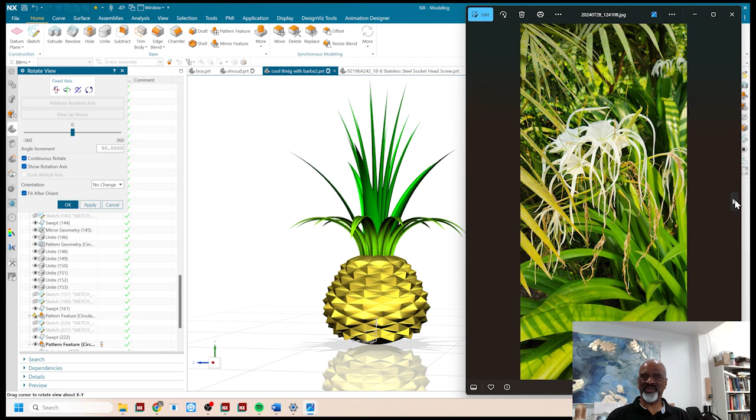And so I have some pictures, and the geometry was so inspiring that I decided to do a number of videos on how to create the geometry and how to borrow some of the shapes for my industrial design. As you know, I've been doing industrial design for many years, and I believe that a lot of really great industrial design comes from borrowing visual cues from nature, natural shapes.

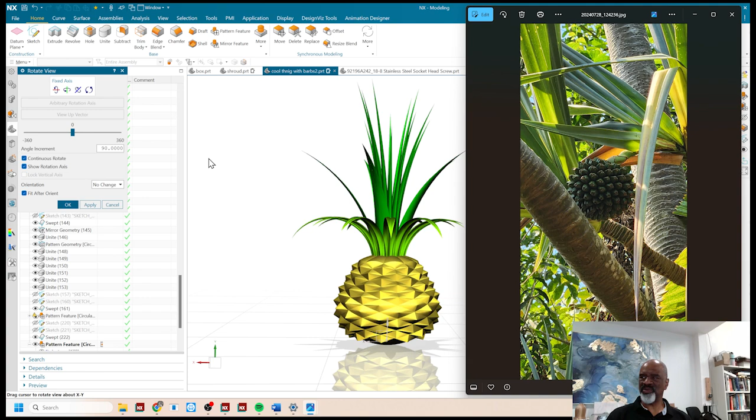And the one that most intrigued me for this particular video was this one here. It's increasingly exciting to me how these fruits and nuts grow with this kind of almost hexagonal pattern, and it looks so mathematical. Also, I went to Scotland, where I saw a lot of beautiful, beautiful design, these buildings.

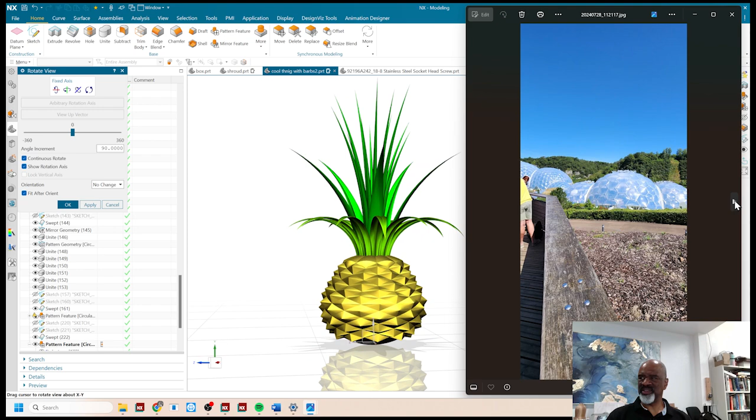I've always been intrigued by domes, but these buildings have stood there for 500 years, 600 years, and so I'm going to be doing a number of videos on some of those shapes as well. So with that said, we have this little piece of geometry that I've done, and I'd like to share with you some of the fine points of how I created it, because it was challenging.

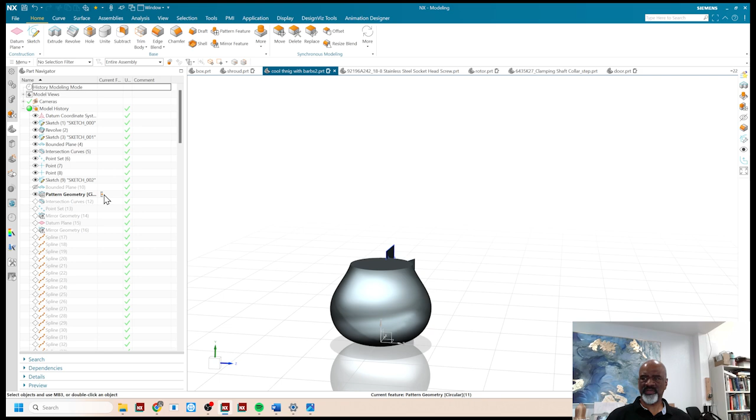And of course, I started with a sketch, and I did a nice little revolve of that sketch. And then I did a number of planes that would enable me to do intersections, because what I've done is created one little section, of course, and then patterned the heck out of it all over. But in order to do it, I wasn't able to use algorithmic modeling to get exactly what I wanted.

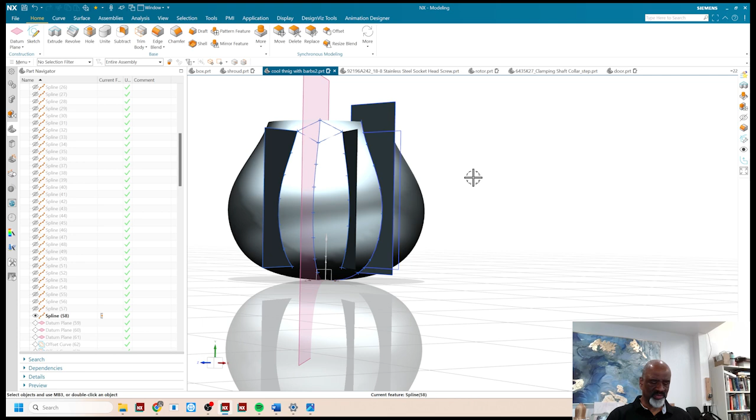So as you can see, I made these number of intersection curves, and I distributed odd numbers of points on them so that I could begin to create these splines that put all the points together. So let's see, what can I show you? If I do a Control-Shift-K, you can see that there's this kind of, I'm going to call it an Argyle pattern. Probably not using the right words, but there's this Argyle pattern that I made that enabled me to start doing some surface

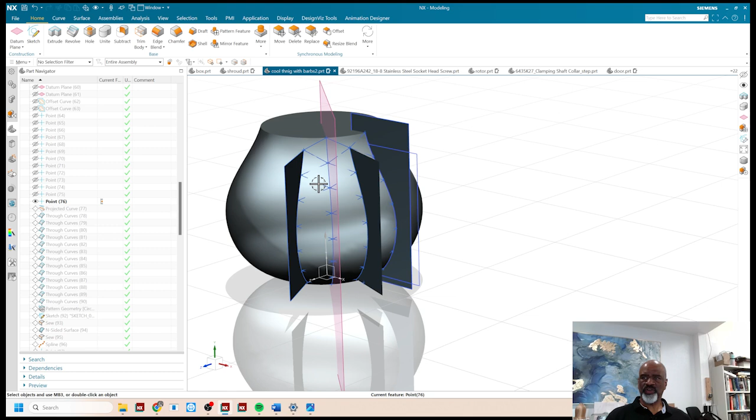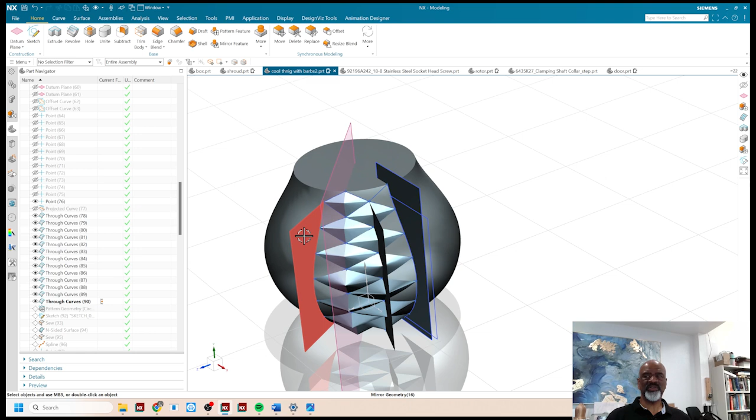projections. And in the end, I took those projections and I put little points. Let's see if I could show you the points. I made these offset points and did through curve shapes from each point to every Argyle pattern. So there you go. I had a section of this piece of geometry that was defined by these two planes. It's an angled section. You can see it from the top.

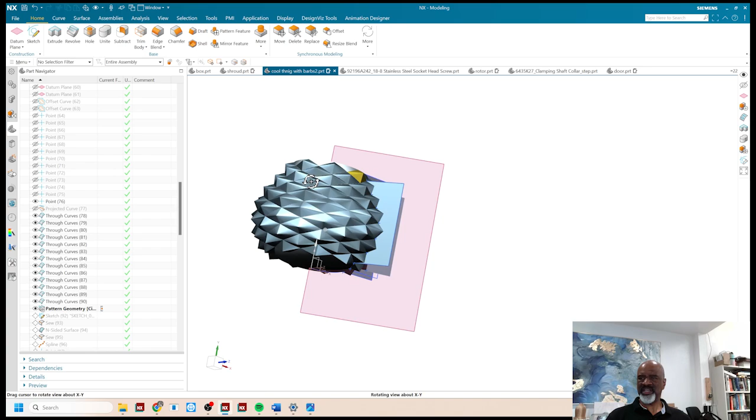And I made the Argyle pattern. I'm sure Argyle's not the right terminology, but you know what I mean. And this pattern was done so that when I patterned the pattern, it interlocks. So as you can see, the next move was to do a geometry pattern. And there you have it. I had a really fantastic set of shapes. These are sheet bodies that enabled me to kind of emulate something that looks like a pineapple.

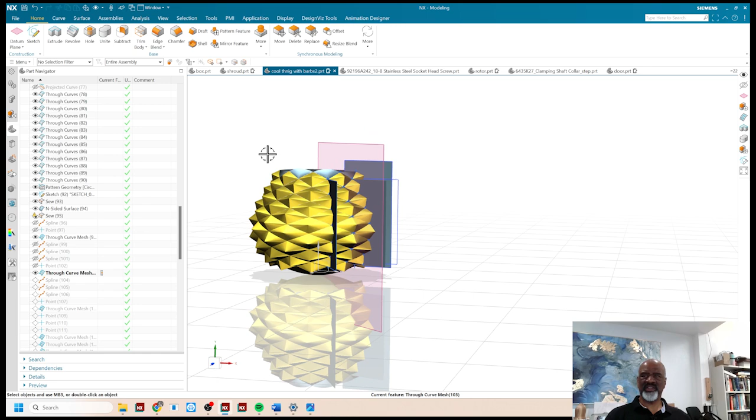So that took me a while to figure out how to do it. Lots of times this stuff isn't really that time consuming. The time consuming part is figuring out how to approach it. And then to do the top of this thing, I would create splines that go from this edge to this edge, and I would make another surface, a through curve mesh surface.

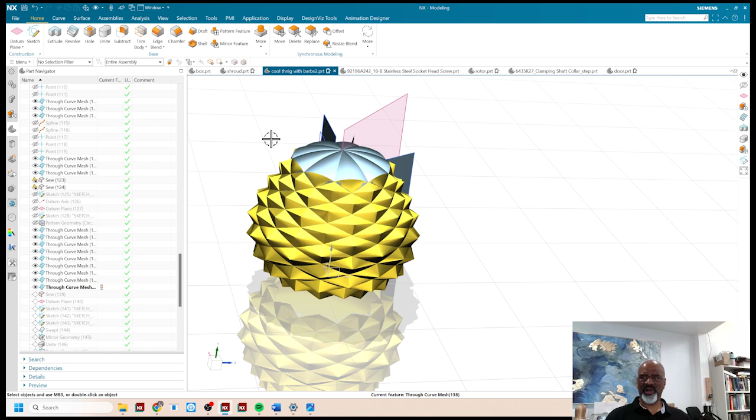So as you can see, there's a through curve mesh, there's a through curve mesh. I tried to pattern it, but it didn't work, it didn't come together. I had to do individual through curve meshes, so that was weird. I'm not exactly sure why. And sometimes I'm sure I'm preaching to the choir with CAD. It's not necessary to try to figure out everything. You know, lots of times things should work but don't. That's just the nature of the beast.

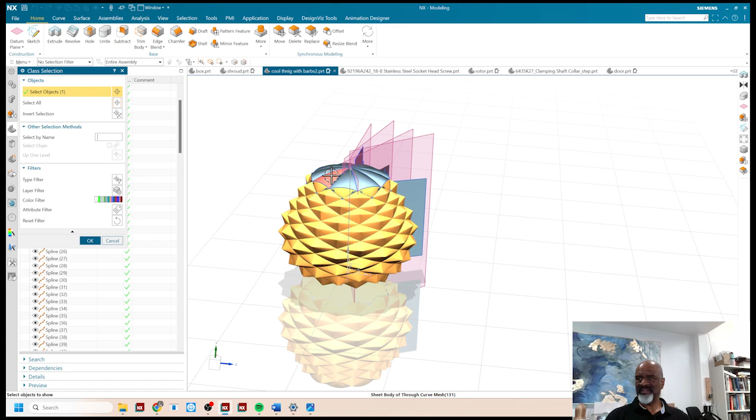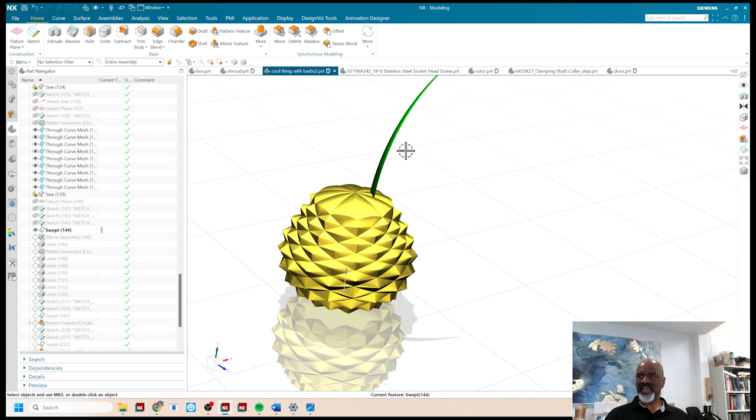So I'm just going to hide all of this so I can say Control-Shift-K and just bring back the parts that I like. Oh, okay, so there you go. So as you can see, I had a sewn together piece of geometry. And at some point, let's go to, where's that? Where am I here? Yeah, okay, here we go. At some point, I had the whole top and the bottom all sewn together. And then I started making these nice sharp leaves.

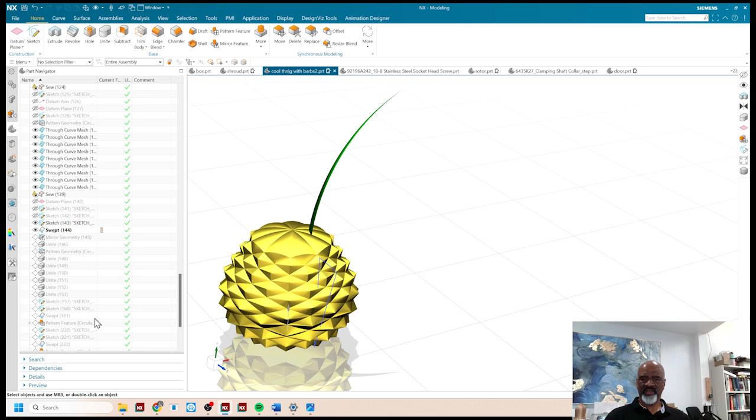The sharp leaves were done with a swept geometry, and each sweep was done with a perimeter law, so I could make it come to a sharp point and then grow as it went. So I did a bunch of those, and some of them I tilted more than others. I did a pattern, and I did a pattern controlled by a spreadsheet, and in the spreadsheet I gave it different offsets so I would have a bit of random going.

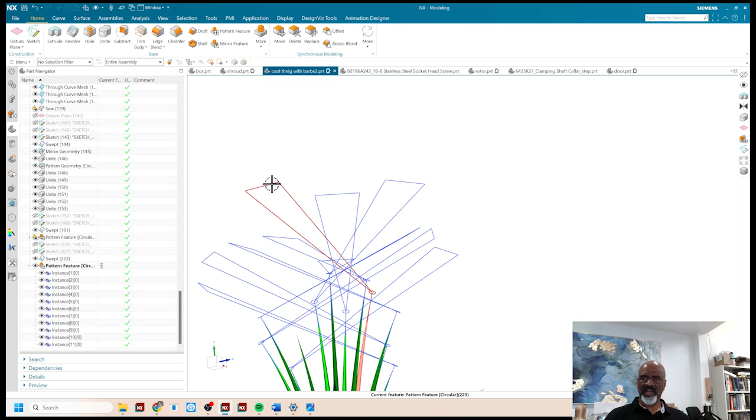And as you can see, for every single leaf, I had a sketch that I used for the law control, and I used a perimeter law. So there was a base curve and a law curve, and the whole thing spanned out. And so that was not so easy. But in the end, it came together very well. And if I say Control W, I can get rid of the sketches. And there you have it. That's a beautiful pineapple-like shape that emulates some of these beautiful patterns that I saw in these plants.

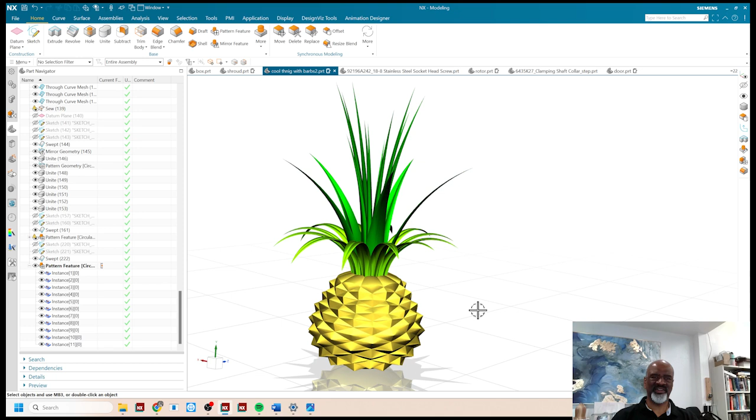I'm going to do a number of other videos on some of the other flowers and shapes that I encountered in Europe. It's really fun to travel because you see things that you are not familiar with, and you absorb that into your psyche, I think. And I think it informs you as a designer, and it makes you a more well-rounded person. You meet lovely people who can tell you all sorts of things that you might learn from.